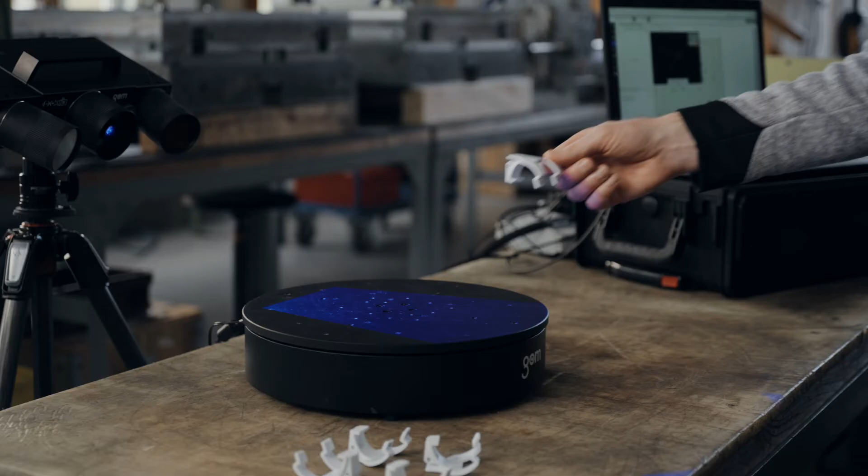To show you how to gain time, we are scanning and inspecting this injection molded part that is used in the kitchen machine. As you know, parts can easily and quickly be scanned with ATOS Q. Put the part on a turning table and scan both sides with 12 scans each.

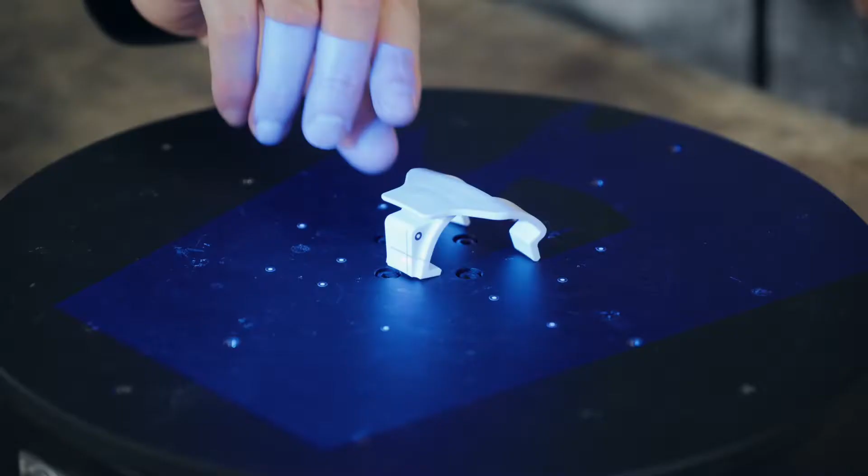Once data is scanned, we are creating a detailed mesh, execute initial alignment and a specific alignment if required in the technical drawing. Color comparison shows deviations between nominal and scan on the entire part, while the section comparison shows deviation along a plane.

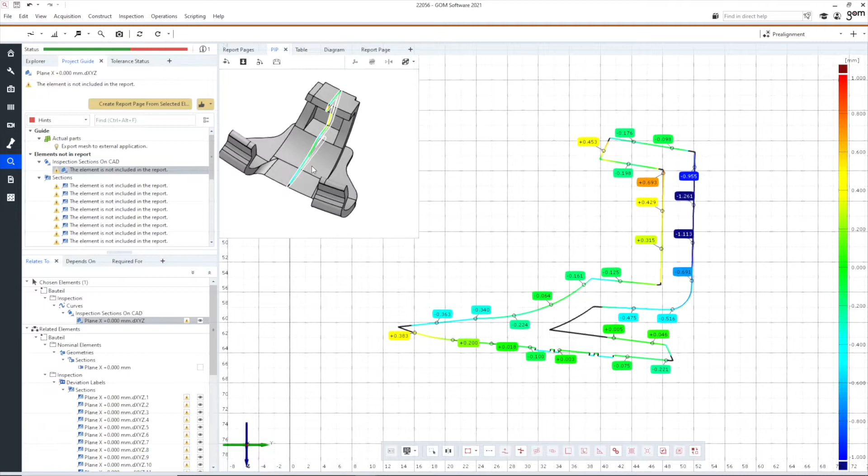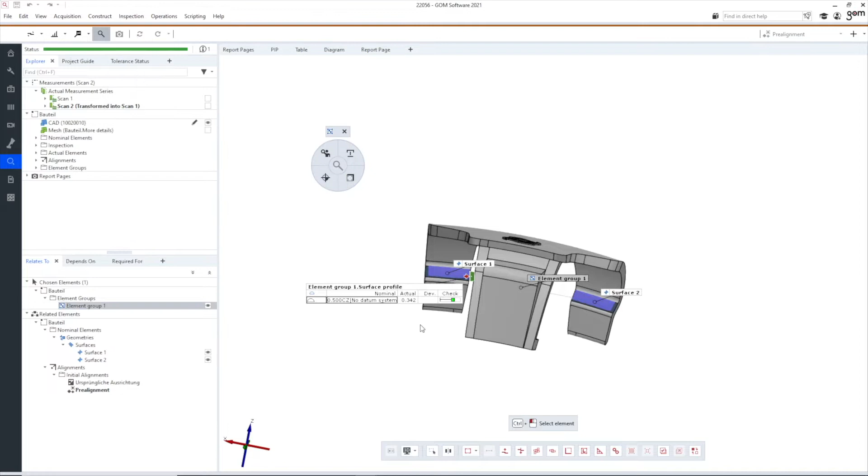Now you can easily set up additional checks like distances or angles and GD&T features as requested in the technical drawing. At the end, you have a structured and easy-to-read report of all inspection results, ready to share with your colleagues. The report can be accessed at any time.

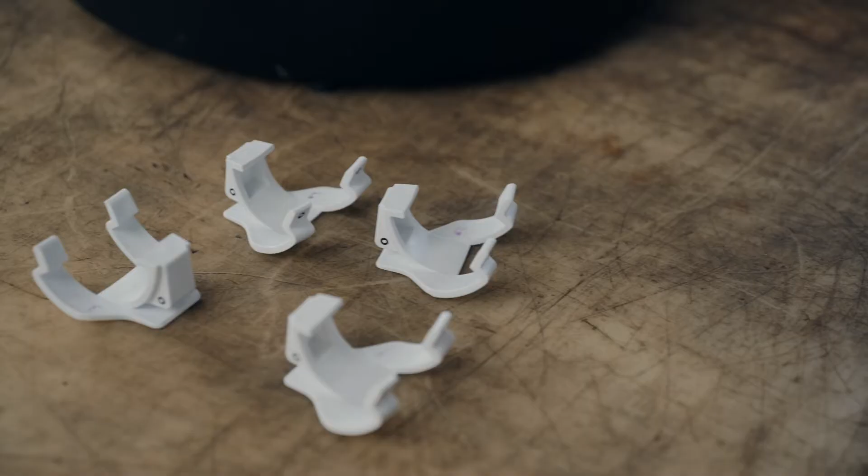Now we have scanned one part, but on the table you see we have to inspect more than one part. So we could start the same workflow again, but remember that I said we can save time by using GOM Inspect Pro at the beginning of the video. How can we do this?

The answer is easy. We convert the shortly created project with all required elements like nominal data, features and report pages into a template. This saves a lot of time on future scans and inspections of the same kind of part, as the template can be used for new scans over and over again. This is how it works. We select the template and open it.

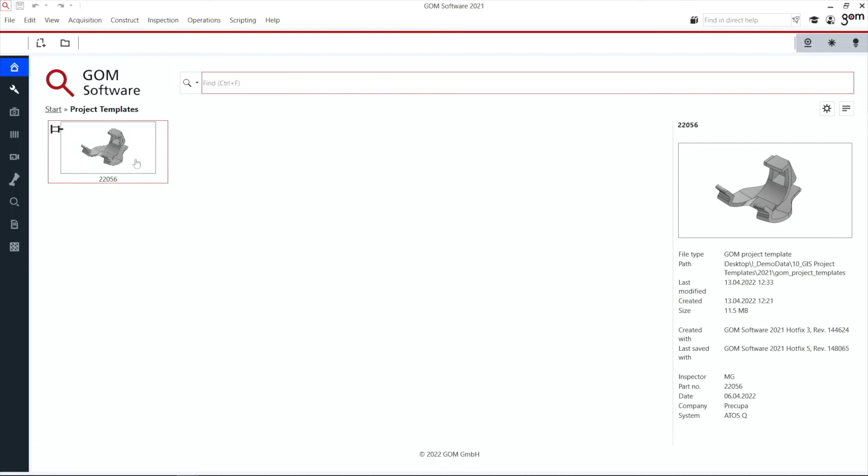Now we take the second part and also scan both sides of the part. After scanning, the software transforms both sides and creates a detailed mesh. Now we can update the entire project with just one push on the button Recalculate Project with report pages. That's it.

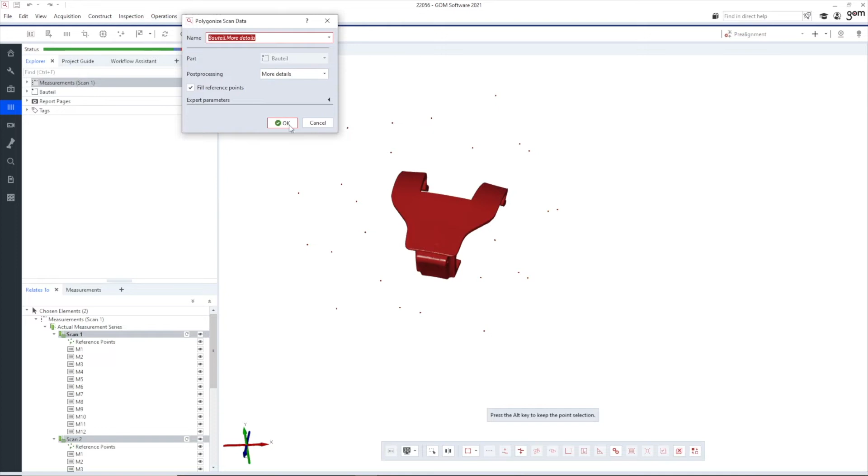Now we have inspected our second part. This report can also be viewed either in the presentation mode of the software or exported as a PDF in one click.

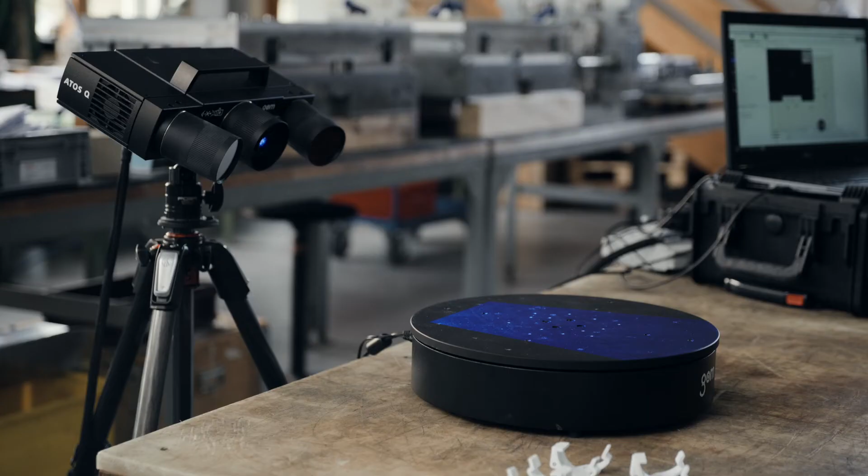Let's even go one step further. As mentioned, we have more than one part, and we showed that we could create a template and inspect all parts individually, but we can also inspect all parts in one project. This enables us to monitor production for a range of produced parts like small series, or take newly produced parts out in regular intervals, scan them and import them into a trend project for quality control.

A trend project can also be derived using the template that we have created from the project. Let me open the template again. And now I not only import one scan, but I will import multiple scans.

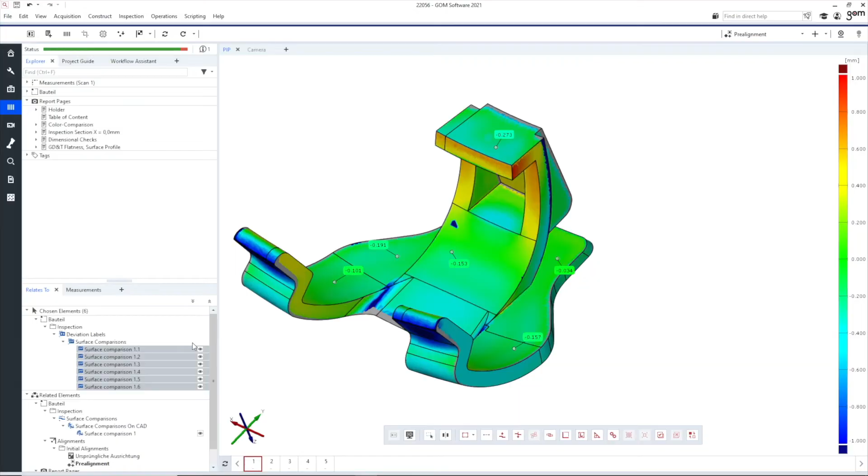Differences to a normal project basically are that a trend project contains several scans of the same kind and shows inspection results in a so-called trend label. Trend labels mainly show the inspection value of features relative to their tolerance. Statistical and process parameters such as Pp or Ppk are part of it as well.

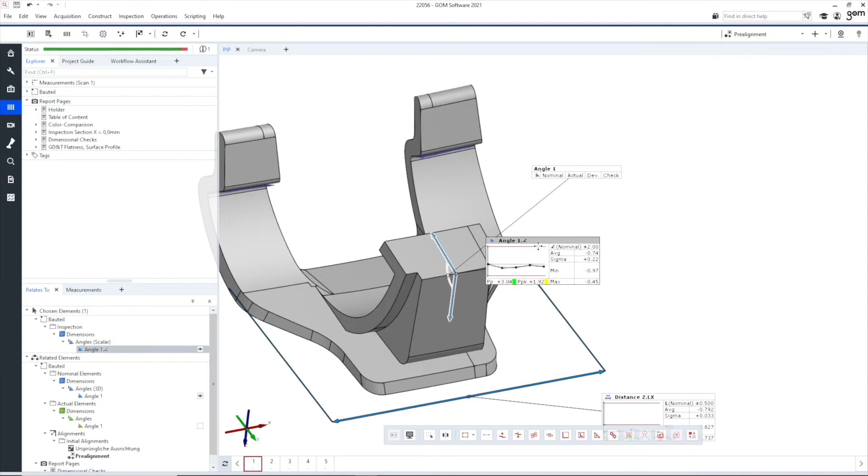When monitoring results over many scans, we can also easily see in color whether certain zones or inspection results remain within the tolerance or are moving towards tolerance limits. If this is the case, the production can be stopped and adjusted in time, which avoids wasting time and cost for rejecting parts. This makes quality control simple and feasible for everyone.

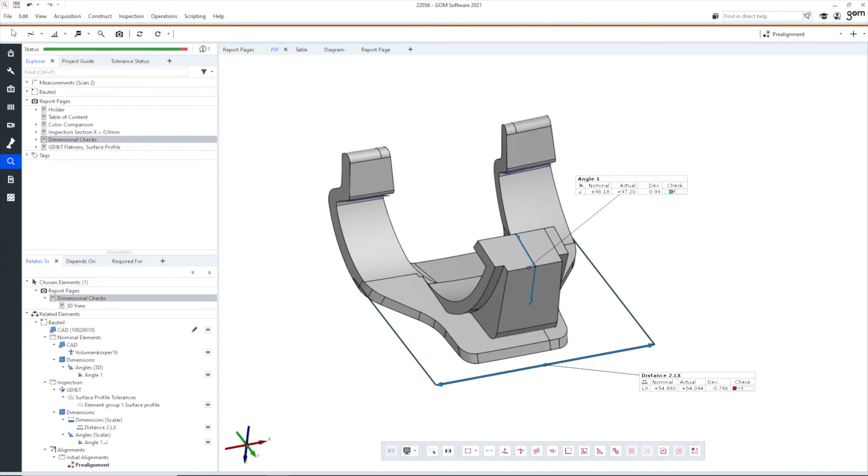In conclusion, by creating a template from an existing project, parts of the same kind can be scanned over and over again without having the need to create a new inspection project each time. You can imagine, this function saves a lot of time and is just one of the features of GOM Inspect Pro.

In addition, with help of trend projects, inspection results of newly produced parts can be monitored and production can be adjusted before tolerance values are exceeded. This avoids the generation of rejects, waste of material and time.